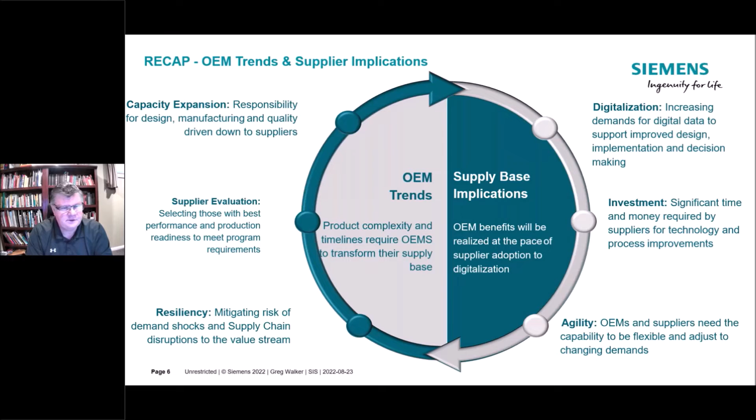Next. So when we look at this program, we're really looking to improve the OEM's customers' ability to meet their business objectives. It's really being driven by them. But we're here to help you benefit, because we're going to help with the roadmap. We're going to be able to help come up with some best practices and help you extend their digital thread into your digital thread, so you can drive the quality up, the cost down, and deliver improvements. Really be more agile in delivering the final results to the OEM.

Next. So at the end of the day, we're looking at a supplier execution program where the first thing we do is we say, okay, yeah, you're doing work for them. We're going to get you qualified. So thumbs up. We're going to offer you the software that we're talking about today and anything around that, part of that accelerator circle I showed you earlier. And we're going to give it to you in a 3-year commit at a really good discounted rate to get the buy-in, so you can then hire more people or invest in another machine or put your resources elsewhere.

And then SIS, we're vetted through Siemens, and we're a platinum channel partner. And the support that we're going to give you has all been vetted through Siemens. We're approved on the aerospace and defense program, so we can help you improve your scorecards and all these other things. But at the end of the day, we want you to get the business, expand your business, and make sure that your scorecard is giving you improved customer satisfaction out there.

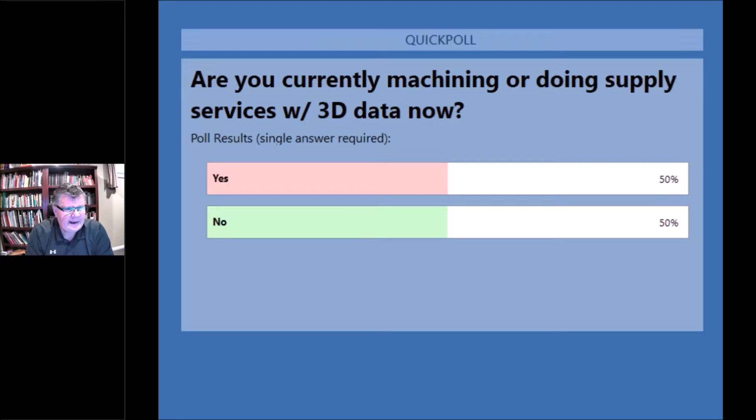Okay, we're going to ask the second poll question. Are you currently machining or doing supply services with 3D data now, as opposed to getting drawings and doing manual efforts? Well, that's interesting, 50-50, okay. So what you're gonna see today are things that are gonna help the people that are already using 3D, and certainly it's gonna help people that are using 2D that really need to get into this 3D arena. You can look at this demo and presentation both ways, but certainly the benefits of being in 3D using PMI data are gonna help you through this digitalization process.

With that, I wanna introduce Sevan. He's going to kick off a presentation on model-based definition, and then also do a demo for you. Sevan?

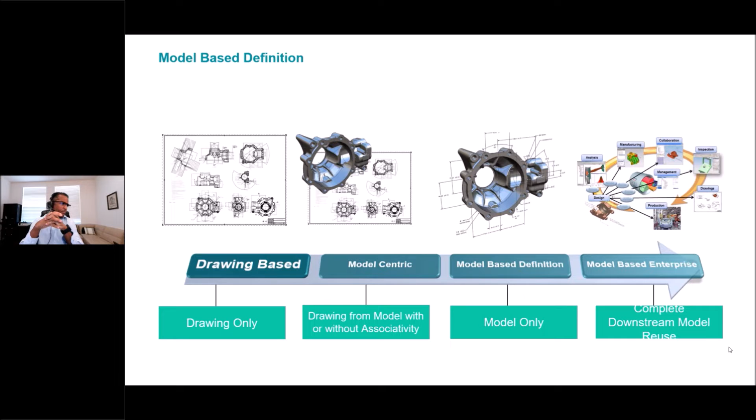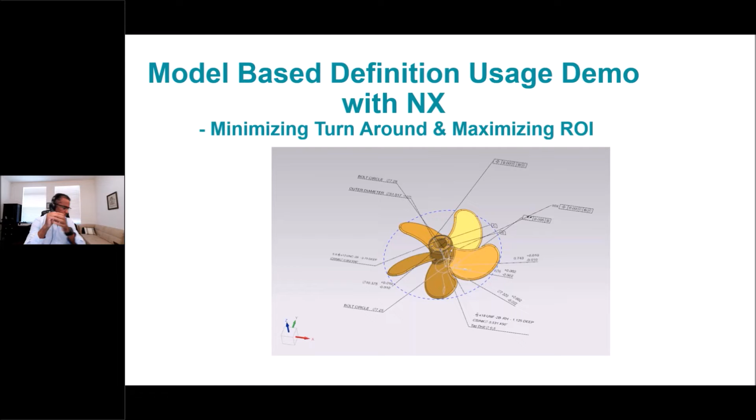As you will see in a moment in the demo, I can run the PMI Advisor. The PMI Advisor is essentially a virtual or digital GD&T expert. I can set all of my rules, whether they be pertinent to my machine shop or to my business or enterprise, and I can have it check and make sure that the tolerances don't have any mistakes. I've intentionally, as you'll see, put an error in the model, and we'll see if the PMI Advisor catches it. And then we can talk about fixing it and so on.

Then again, from our MBD, we can go to staged models. Gone are the days of having to have 5 or 6 different people that are experts in NX. As you'll see in the demonstration with staged models, a process engineer with half a day of training can go and delete out features so that when the part models are delivered to the programming staff, they will look as they need to for the initial stock model, and as they need to if, for instance, we're milling a groove or turning a groove. So you can quickly generate the models and send them to your internal or external customer.

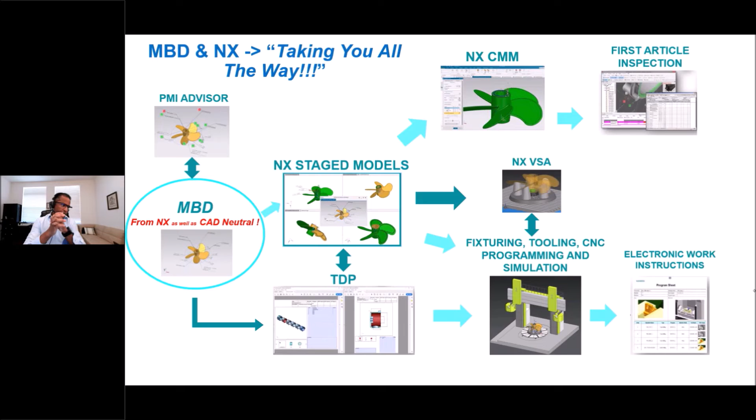And then, of course, through NX CAM, you can create your electronic work instructions. Okay, so on my screen here, you should see the model of the propeller. And you will notice on the left side of the screen, I've got model views. So right now, I just have a clean view of the propeller.

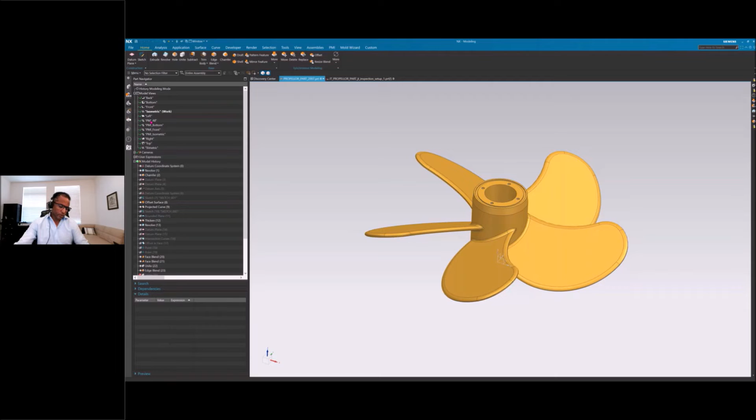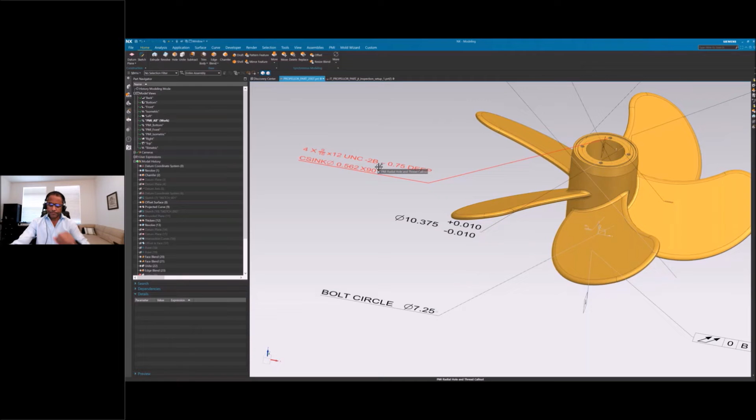And then what we do in PMI is organize our PMI into views, similar to how you would in a drawing. So in this view, I now have all of my PMI - you can see my datums, my A, B, and C datum. I've got some feature control frames, a bolt circle, a bore with tolerances, and a hole callout.

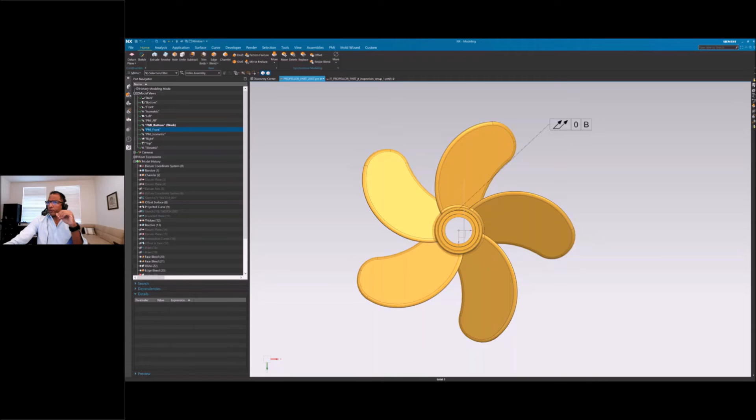Essentially, you organize everything as you would, and this is a choice. Most of the OEMs, if you receive a model from them, this is how they work and organize it. But you can quickly go and see what the bottom drawing view would look like, the front drawing view, an isometric, and so on. So it makes it easy to organize the dimensions.

Then of course you can go to an MBD query, and let's say you've got a huge model of, I don't know, a Boeing 757, and you want to find a datum, or you want to find anything related to a diameter. You can do a text-based query or a rule-based query, and you can quickly go and find your PMI.

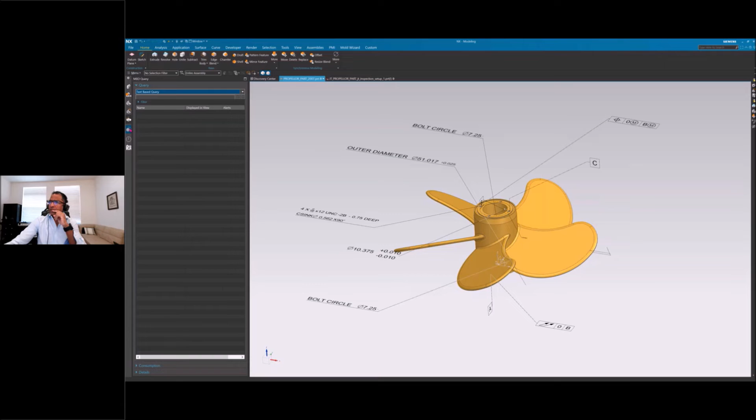So let's step into the PMI Advisor. Maybe I haven't mentioned this, but PMI stands for Product Manufacturing Information. PMI is essentially the foundation on which model-based definition stands and is built on, and which, of course, a model-based enterprise is built on. All of the information needed to manufacture the part, whether it be the material, the geometric tolerances, or the sizes, is defined in PMI.

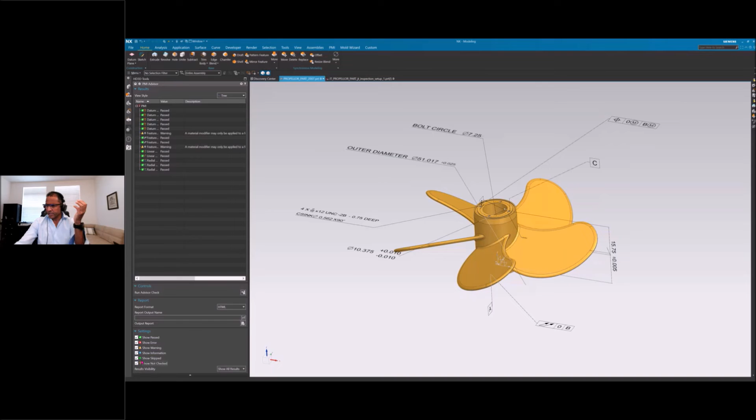The PMI Advisor is what we use to take a look and make sure there aren't any errors. It's as simple as coming to the HD 3D Navigator here and hitting Run Advisor Check. Then I want to look and see if everything is okay, and I can see some green check marks. I'd like to see if there are any errors, warnings, or information, so I'll click and show everything here. You can see that most everything has a check mark, but this feature control frame here has a problem.

Let's see, so it's shown here, and I want to go fix that. So let us go and find our feature control frame. Essentially, when I find it, I will go and edit it and remove the problem. So here we will edit it, and I get this dialog, and here are all of my options that I have to add to this feature control frame. And we will go and remove our problem.

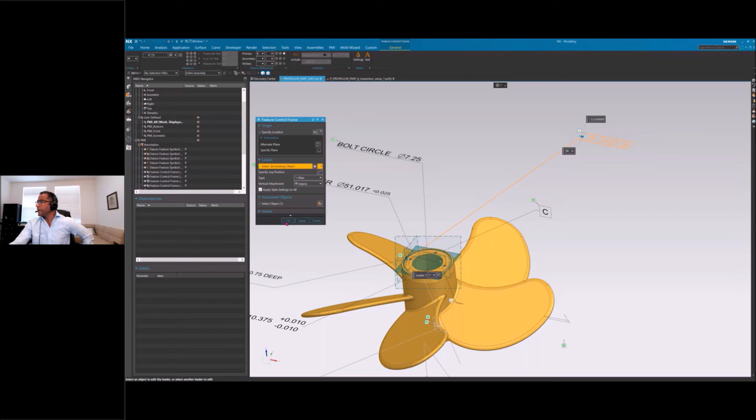Oh, it says here, by the way, the feature control frame has warnings: a material modifier may only be applied to a feature of size datum reference. So I had a max material condition in a place where it's not applicable, and we'll say okay. Then we can go back and rerun our advisor check, and you'll see that we now have all green check marks and things are happy.

So that's a quick glimpse into the PMI Advisor and how it can be your on-site GD&T expert, verifying and checking your models - whether you are designing the part and applying your tolerances and dimensions, or receiving it from an OEM and wanting to make sure there are no conflicts or issues with it.

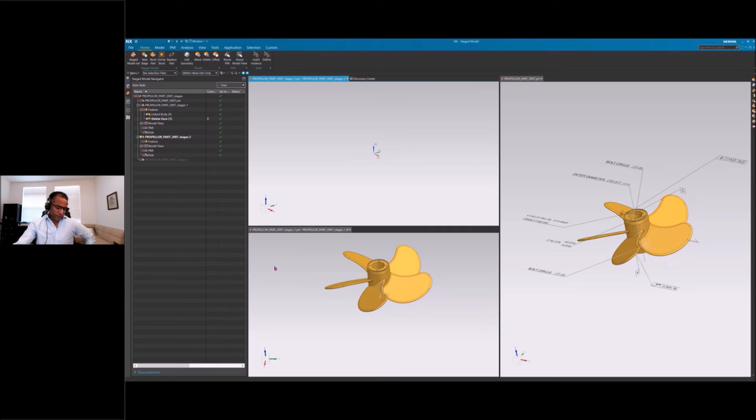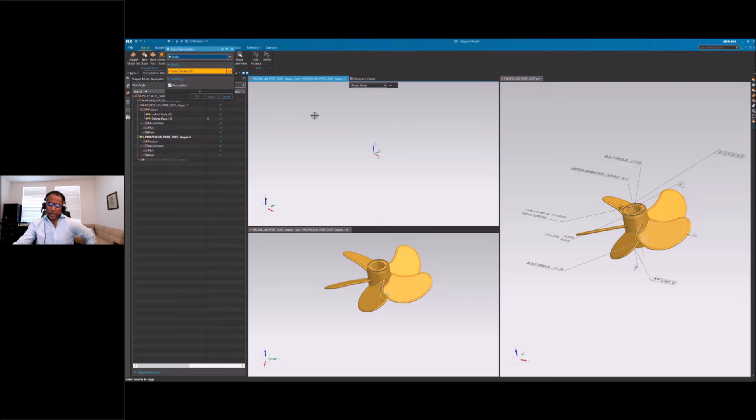All right, so let's take a peek at staged models now. Here, I'm going to be a process engineer, and I initially received the model of the propeller, and I'm creating stages. So this here on the right side of my screen is my finished model. Maybe I've got stage 1 here, stage 2, which can be op 10 and op 20. I'm just going to quickly come here and show you if I'm creating a model.

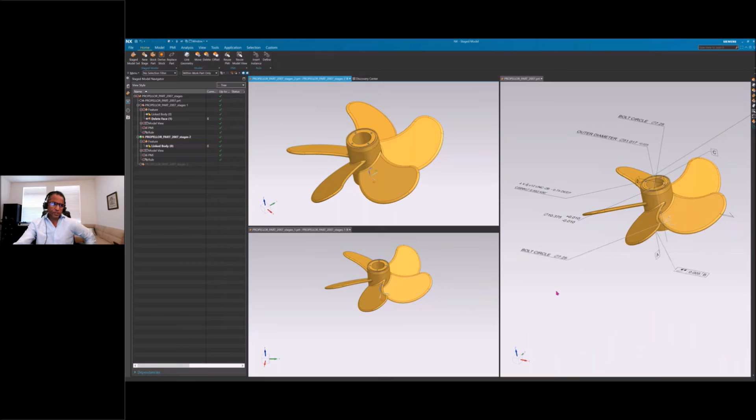Let's say we're creating a blank for this next operation here. I will wave-link to this model, basically creating a link of it, or a fully associative copy. So the important thing to know here is this is our master model. Let's say our supplier makes a revision change - maybe the number of holes decreases, the tolerance changes, or the bore changes. All of these models are associative, and the information will update.

But let's say we're going to machine these holes now. It's just as simple - I'm going to go to delete. And let's say in this operation, we're going to mill this groove, and we are going to machine the holes.

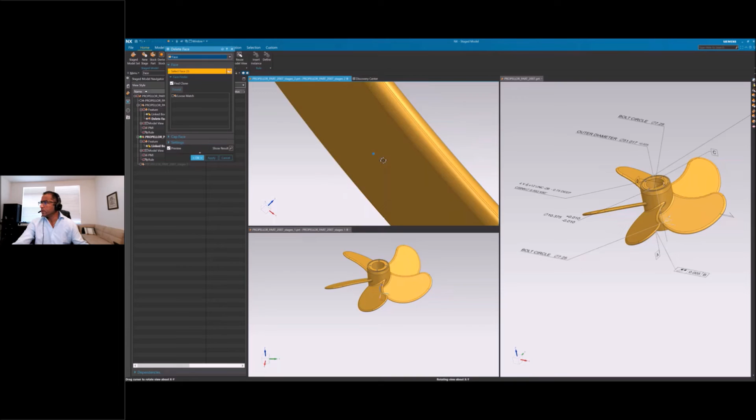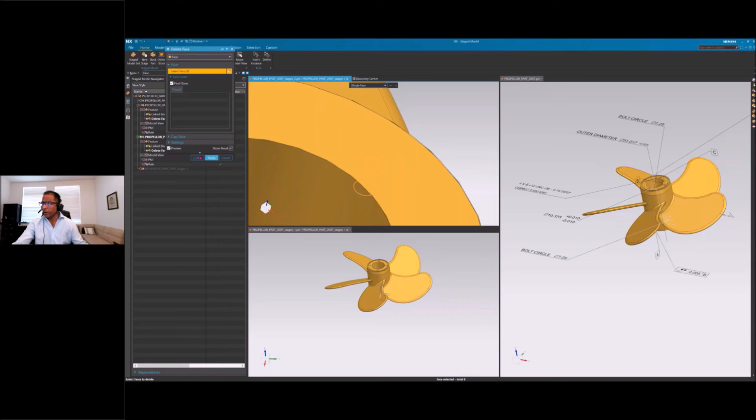All right, so you can see we've now deleted the groove. Let's go ahead and delete the holes as well. You can see just how simple it is for a process engineer or whoever your planner is to go ahead and make modifications and then send them to the shop for them to use.

So in NX CAM, I would then have this as my blank that I'm starting with, and this would be my finished part that I would be machining to. And of course, in the background, NX will use all of this data, the PMI, to determine

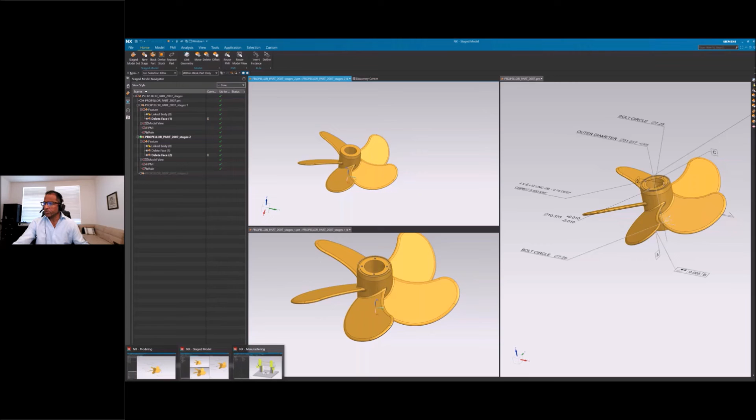what kind of operations we need and how to go about it. So next, let me show you, we will go back here. In my PMI tab, I just want to show you, we have a technical data package here. It is as simple as hitting publish and selecting a template. I can create templates, and these are actually out-of-the-box templates from Siemens of what views and such that I want to create, what the layout is.

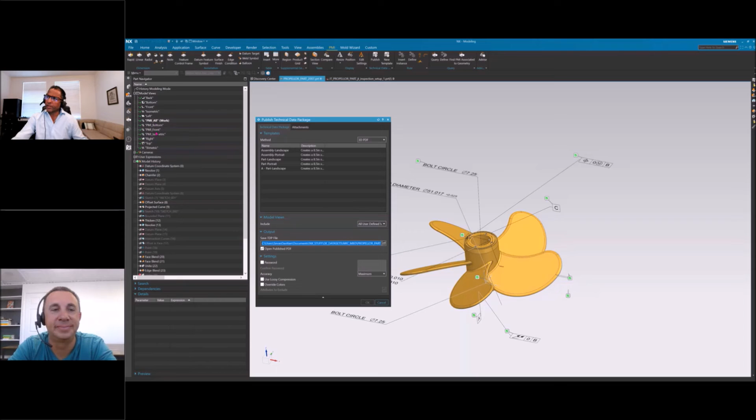Choosing to do a 3D PDF, and then the model views. Let's say I only want to include my PMI including views and not any of the basic ones, I can select to do that. For security, I can apply a password so that if anyone gets a hold of the file in the company that shouldn't necessarily have it, you can set a password to it. And here in the attachments tab, I can navigate into Windows and find any files that I want to attach. They can be pictures, they can be a CAM program, they can be anything under the sun that you want to send with the technical data package.

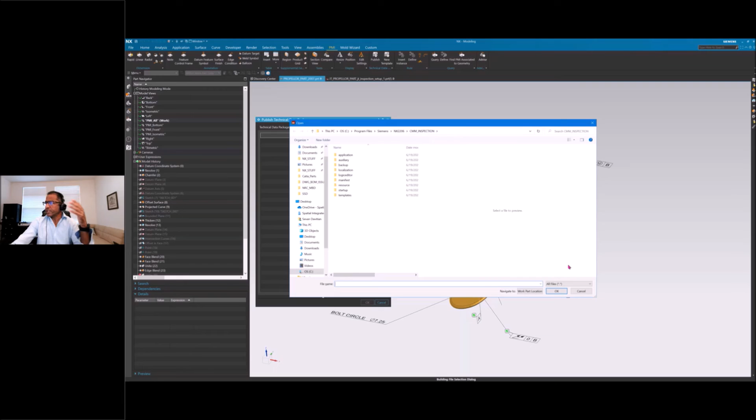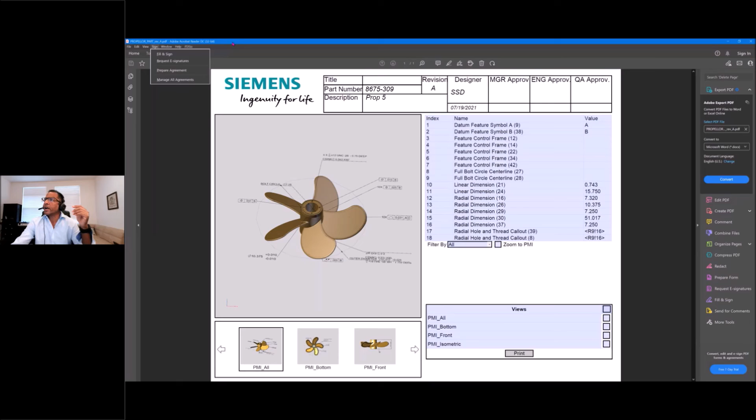I'm just going to hit cancel here and show you the end result that you would get, which is this 3D PDF. I'm in, I think it's Adobe Acrobat Reader, standard free download. You can see this is a 3D model here. I can zoom in and look at my dimensions.

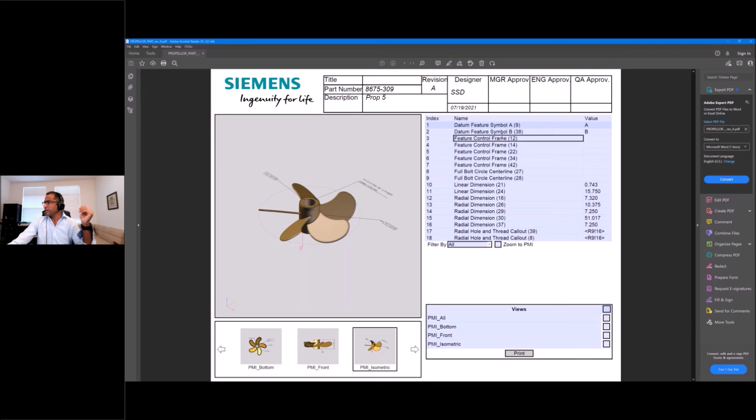And best thing ever as a programmer is I can quickly go and find things. So I want to find where my datum A is, I want to find where my datum B is. You can see it's highlighting and changing to a view where I can see it. I can quickly snap to my PMI bottom and roll around my front, so on and so forth.

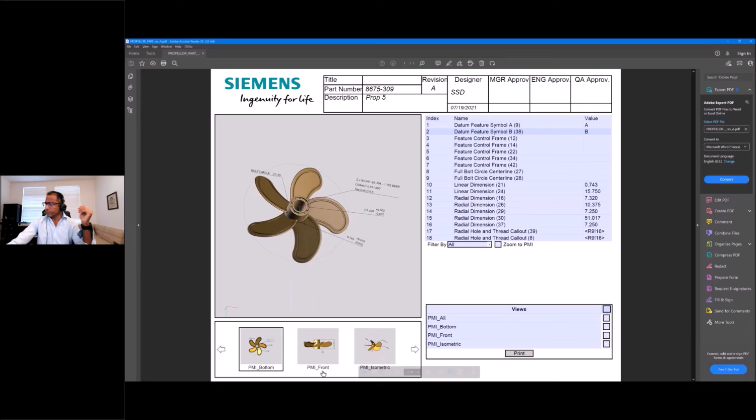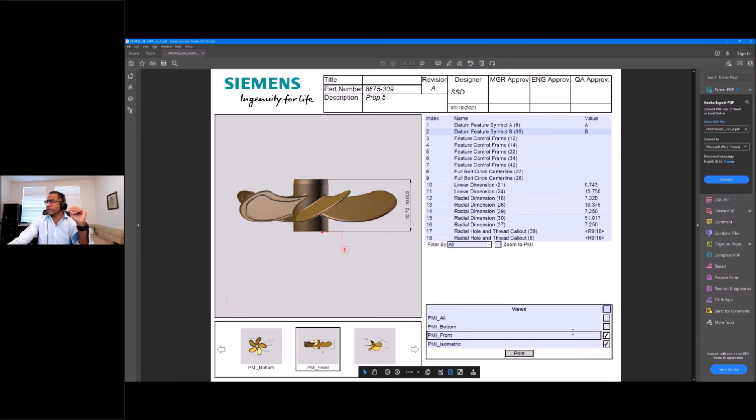And then let's say this arrives at the shop floor, and the guys on the shop floor just want the views so they can have a piece of paper taped to the machine. It's as simple as coming here, checking which view you want, and hit print, and you can create a paper drawing that they can have on the shop floor.

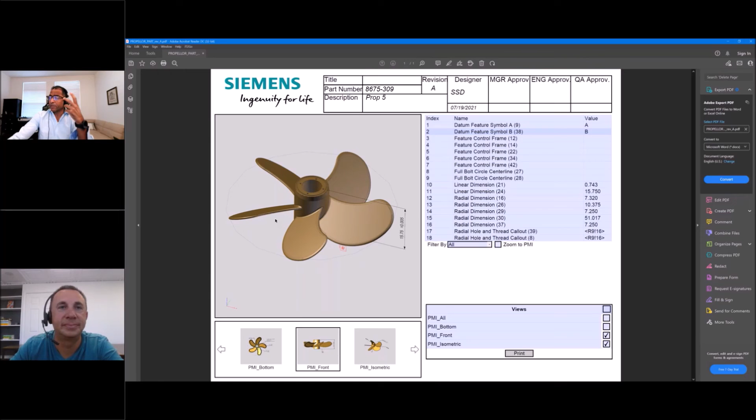And that's another thing that I didn't mention, and I probably didn't speak enough to, but you create your model-based definition file, you have a drawing for free. Let's say the guys on the shop floor don't have a workstation to look at it in 3D, and all they have is a place to hang it, or for your traveler that goes with your part, you want to have a sheet of paper. All of that is free.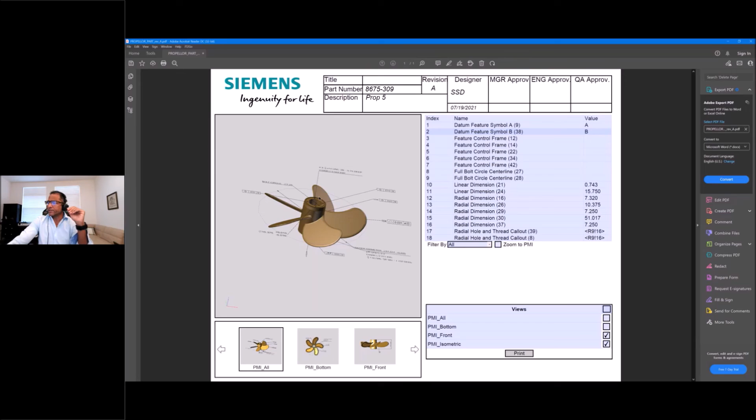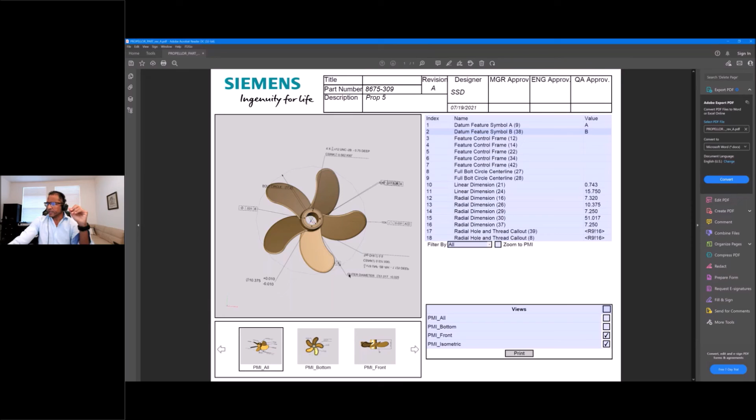You can essentially come here and print it, or even from the NX interface, as I showed you the organization, you can go to the top view, hit print, and you've got quickly a drawing. And all of this stuff immediately updates as we make changes in CAD, it automatically regenerates. So that is the technical data package.

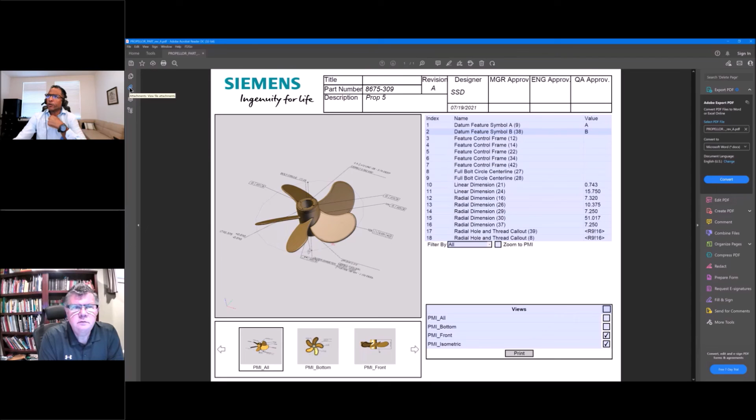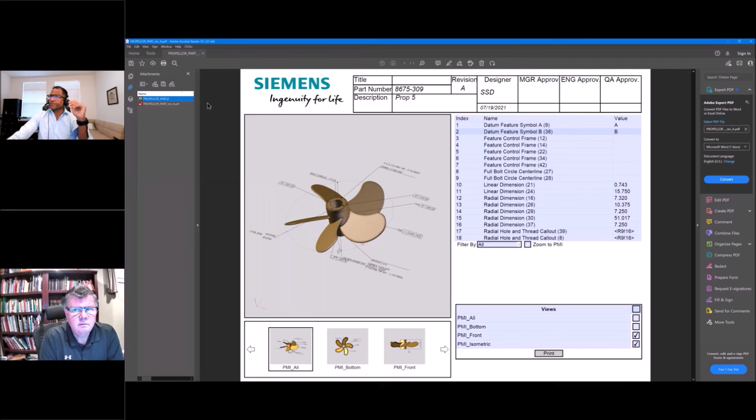Here on the left side, you will see in Adobe attachments, and I don't know if I have any attachments. Yeah, you can see in here, I've got the part file and I've got a JT of the part file. Those are attached in here, and I can go save them out from here into my computer. It's just a Windows dialog, and I can go to my documents or wherever and save them out. Again, this is just standard Adobe.

Hey Sevan, we're running out of time, and we are going to have a follow-up thing in a couple weeks, a lunch and learn I can talk about, and we can dive in deeper. I think we need to wrap this up because we're running out of time.

So yes, anyone who is interested in seeing deeper into things, I didn't really get to show you in NX CAM, but you can see I have the propeller here in a 2-channel machine.

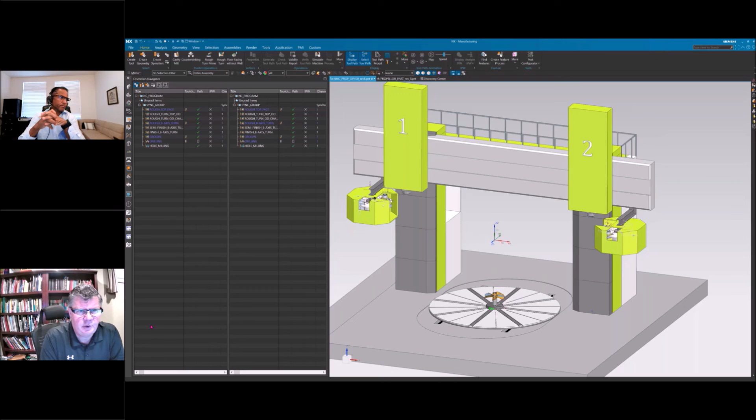In summary, what we've seen today is that NX is the core. It is the center of our manufacturing process. We design in NX, we add our PMI to create MBD. We can program the CMM, figure out our process, send the models, do our first article inspection. Everything that you need happens in NX.

And I guess you're probably not seeing my screen anymore, but I can show you in a demo that essentially from within NX, you choose which environment you want to be in, and you transition right into it. The CAD data can come from any source, whether it's an NX part file, a JT, or a STEP 242. NX is able to use the PMI data from there. So as you can see, we're able to leverage the power of a JT file, and you really minimize and actually eliminate the need to go into a variety of other systems. You can do everything you need within NX.

And therefore all of our data is better managed. There's no need for import, export, and making sure which version of what file is where. Literally in one click, you can update everything, and everything will be current. Reducing or eliminating escapes that may happen because maybe I send a program to the shop floor that is based on a different version of the file. Everything is self-contained and version and revision managed.